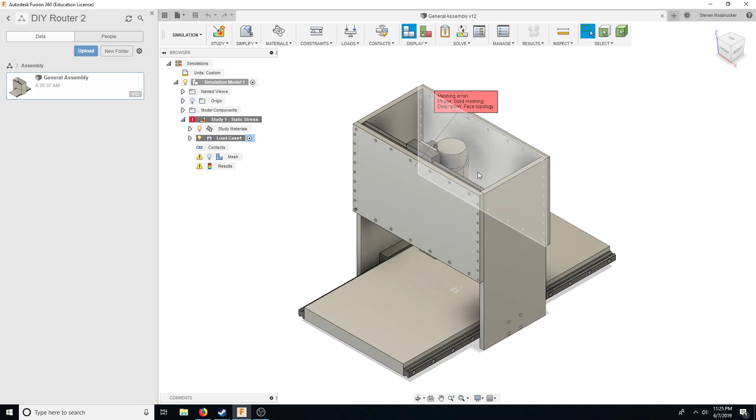So I need the White Knight belt 3D printer. I need to build this shredder. I need the laser. I need an arbor press and a MIG welder, and I already have the MIG welder, so that's good. Then I need to clean the rest of the garage, so I could finish the multi-shooter, start manufacturing the shredder, start manufacturing the eco-based 3D printer, and finish up the design on the fill factory.

So the main things are to get the shredder running and starting to be manufactured, then get the multi-shooter out, and also start working on the CAD to open source that, because I think it's a pretty nice project. I think the Precious Plastic guys would really like that one because it does both injection as well as extrusion. Really excited about that, so hopefully I'll start a series on that.

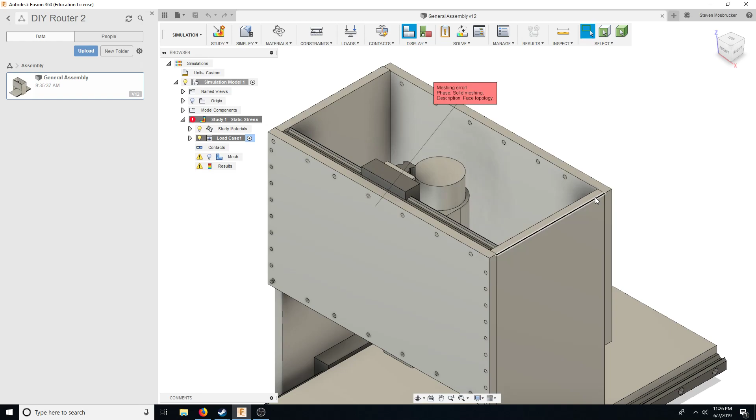I can't remember if I started a series on Legit Tech Tutorials, another one of my channels, where I design this all in video format, which I'm going to do the last one on in about 4 minutes after I conclude this video, where I add the lead screw here as well as the lead screw on the bottom that will be connected down here and pushed across.

Okay, so that's kind of what I'm working on right now. Obviously, Maker Faire has come and gone. I did not get a ticket, so I have a small space on my wall now because I did not show there. I have three of them, and one of them I did not attend. I did attend one of them as just a regular attendee, not an exhibitor.

So hopefully we have everything working by next Maker Faire. By next Maker Faire, everything should be in order, and I should be full-time with the Green Engineers, theoretically speaking. I might still be working a little bit at Applied to get money coming in, but as of right now, with complications at work, I might not be working there in October. We'll have to see, because of a recent downturn in tech this year in 2019.

Anyways, so yeah, we are progressing forward. We're getting the equipment and the space to work that is very reliable, obviously at home, so while this stuff is manufacturing equipment, as most of my machines are now CNC, I could be concluding other work. I could start looking for either a house to rent with a garage for myself, or a shop, so I could do this full time, as well as maybe some job shop work for Applied and other people, and also some consulting to make sure I could pay all the bills.

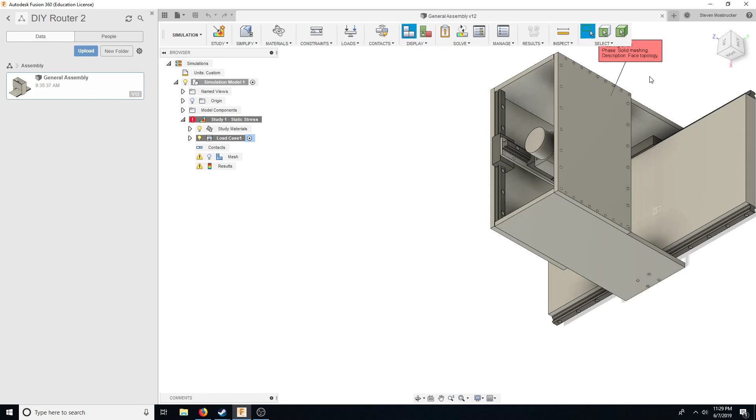Okay, so this has been just a quick update, about a 7-8 minute update on what's going on and what is in the future for the Green Engineers. We are pushing forward, getting closer and closer by the day. I'm starting to decide more on a laser and starting to finish the design for the shredder, for the router, the metal router to machine the shredder, and things are looking pretty good.

That is basically it for the most part. Anything else? That's pretty much it.

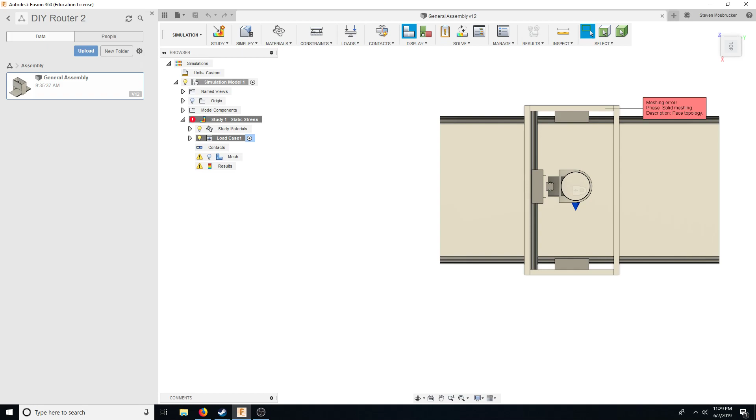So more videos to come of me getting footage of this shredder, which isn't super representative because the blades are not at 15 degrees, and then a video of my laser, a video of this guy being manufactured, my arbor press, the White Knight 3D printer, and more detail on the fill factory.